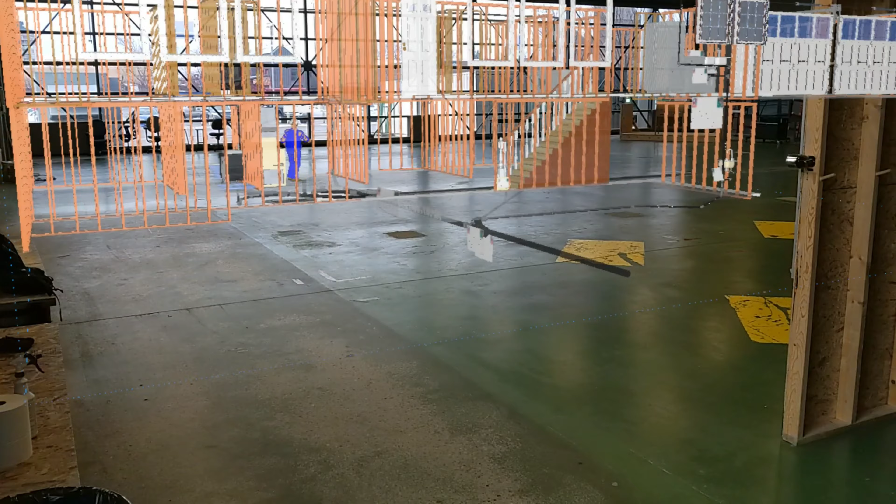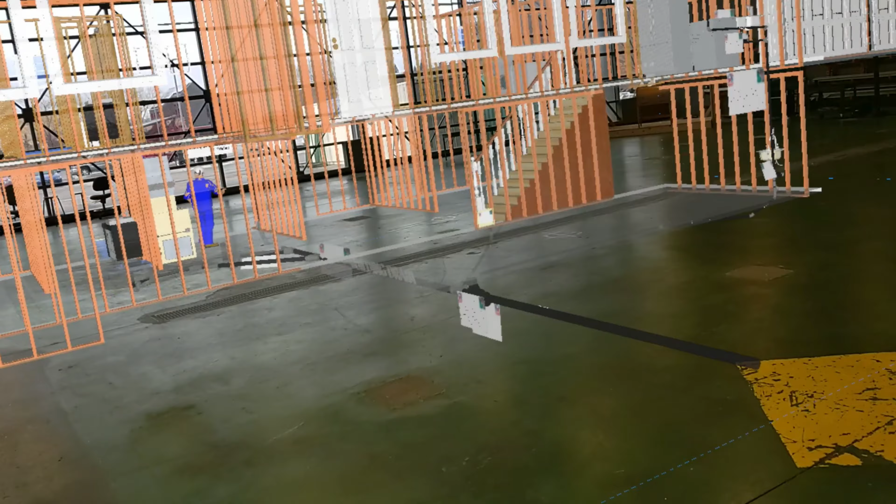Hi, this is Fred Bretsky at the AECOO Connector Lab here on the SAIT campus. Here we've been able to augment this bungalow, which is part of the second-year blueprint package for the pipe trades here at Sait. This is going to show the basement floor and the main floor of this house.

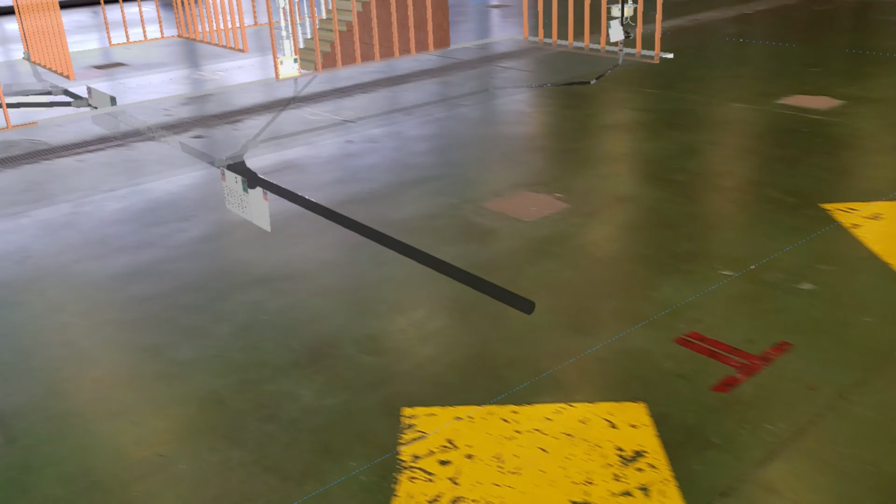Now, what's great about this is we can see the piping underground, which would be really cool. Can you imagine if you get your house built by mixed reality? Well, this is the house from the blueprint. We just augmented it out of the blueprint. And then you could actually see the plumbing underground.

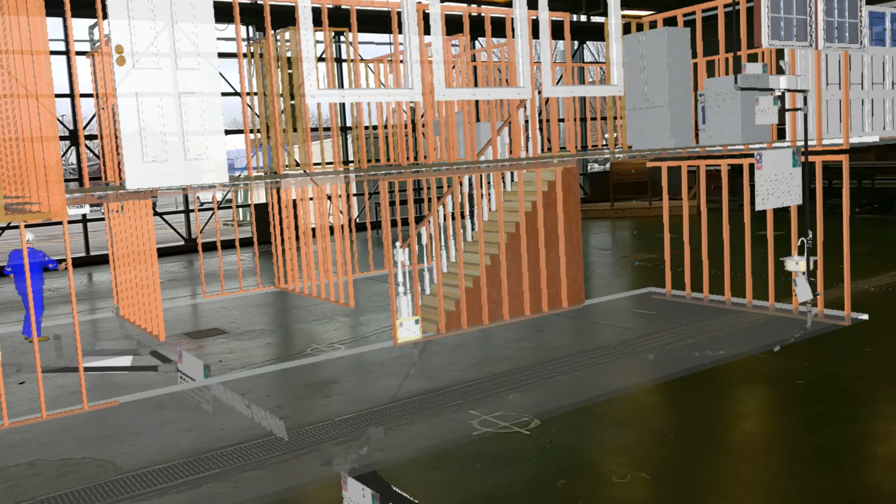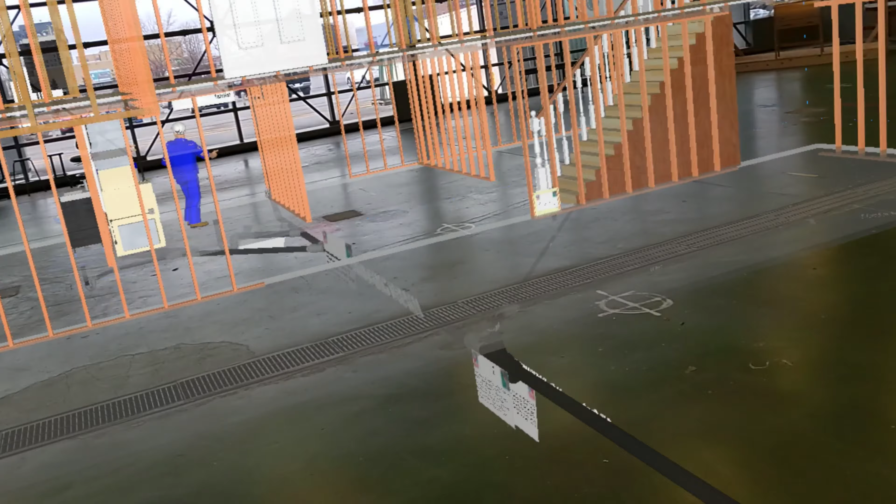This would save so many problems, because you must realize that if I send two plumbers to the same model of the house, they're going to rough it in a different way. They don't show the rough-in plumbing on the blueprint. That's what we teach them here at Sait. So this one I roughed in, and this is probably the closest you could get to actually doing it in real life. I've tried to do this to almost one-to-one scale.

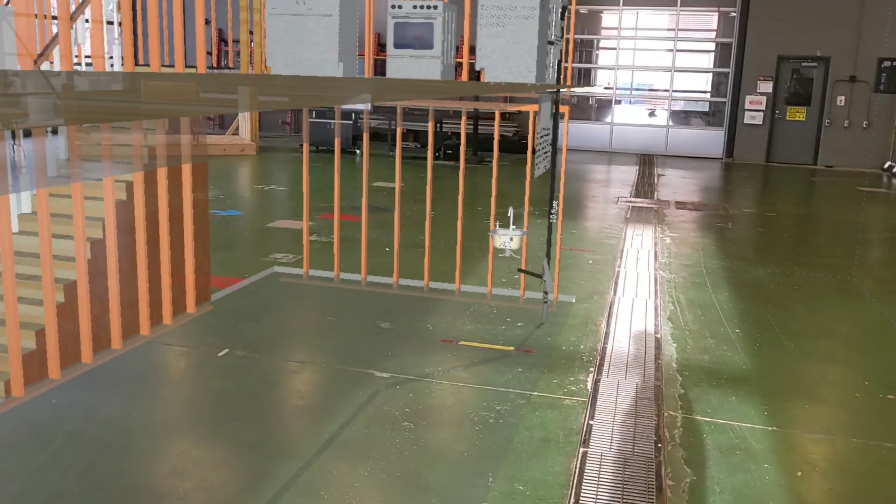So this is a bungalow. We're looking at the basement right now because I want to look at the basement plumbing. So here's the rough-in. So this would be the building sewer outside. So out here would be on the city property line, and then in here would be the sanitary building drain, which is right inside the foundation wall.

And there you're looking at the clean out, so we should really pull this up higher, shouldn't we? So I'm going to pull this up higher so you can see it's right above the floor. You'd see this clean out, and the rest of the piping would be under the floor. So that's our normally open backwater valve. So when you're roughing in a house, we want to keep the pipe as straight as possible, which is what we've done here. Today we're just going to show you a bit of the underground.

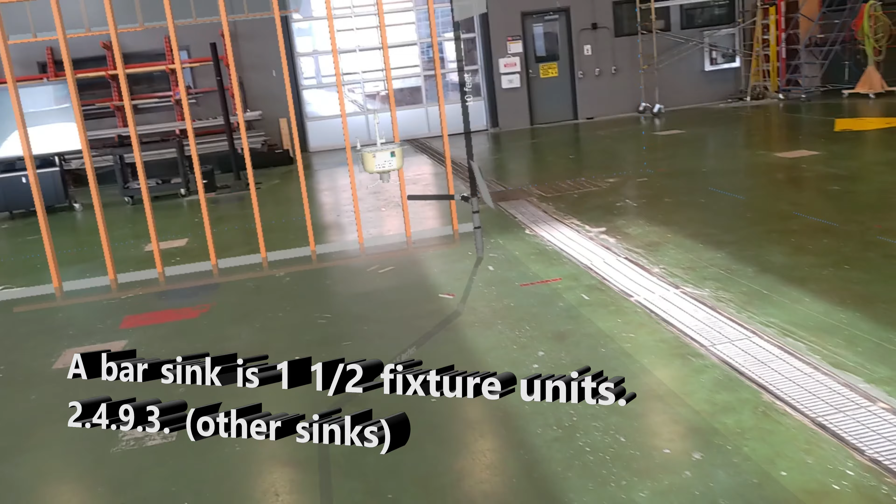So when the plumber first came in, he roughed in the Y here, and this is a 4x3 Y. In SketchUp, it's all to scale so you can measure it, but I wrote down the measurements. It's 3 foot here. And so I just took a 3x2 Y off and went down to our entertainment sink or bar sink, which is right here. We call this an entertainment sink or a bar sink. Still haven't hooked up the P-trap. Let's keep that still.

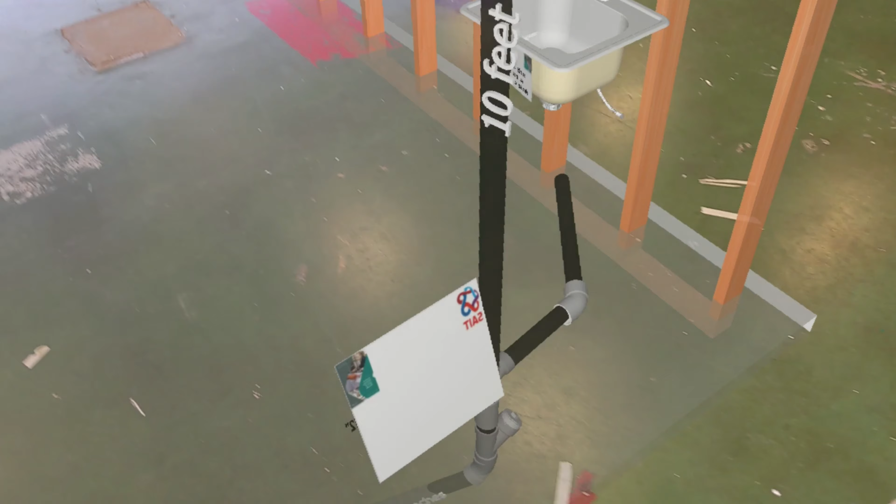And there we did a multi-story wet vent right up to our kitchen sink on the top floor. And there you can see I offset the stack vent around the window, and it goes up through the roof. So if we come back into the building here, let's go back to the sanitary building drain over here.

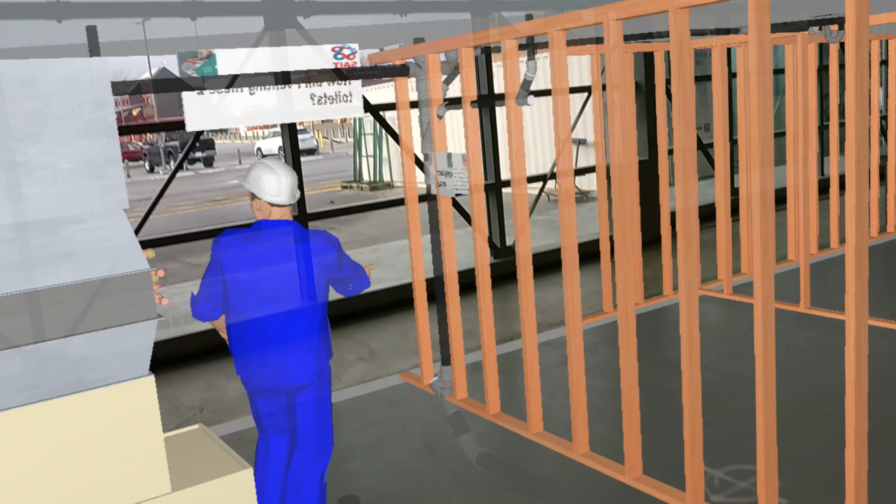Here's our building drain. See how we ask the question here, where does the sanitary building drain begin? It begins at the most upstream soil or waste stack, branch or fixture drain that has a toilet on it. In this particular case, the most upstream stack would be right here in the mechanical room. I'm going to lift it up a little more. Right here in the mechanical room.

And, how you doing, bro?

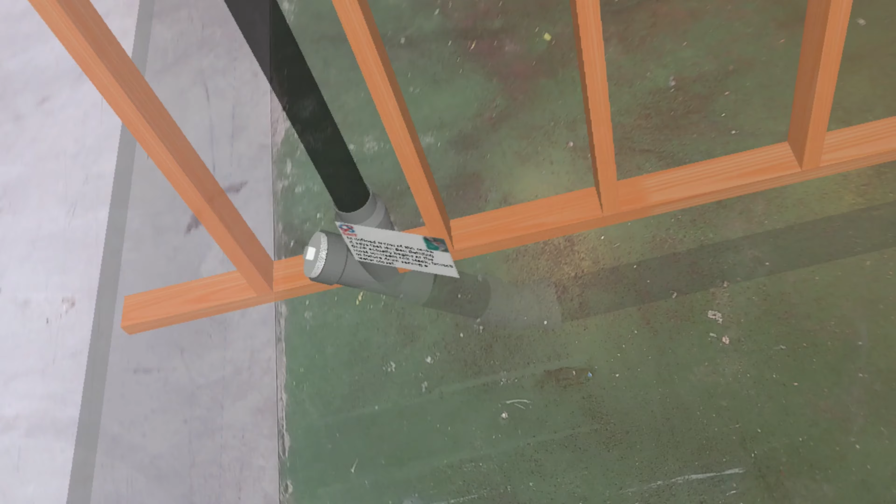Down a bit. And here's the main clean out. So if you follow it, the most upstream toilet would actually be this trap arm going to this toilet as I walk through a wall right here. And there's a toilet above. So that's the most upstream stack with a toilet on it. And there's your building drain.

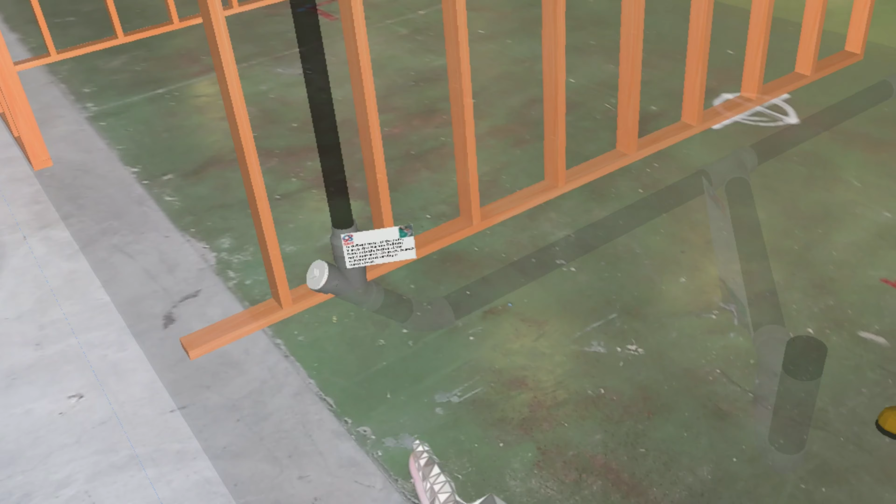Over here, I've run a floor drain, as you can see. And you can run that floor drain 32 feet, apparently, according to the code, 2563, without a vent if it's 4 inches.

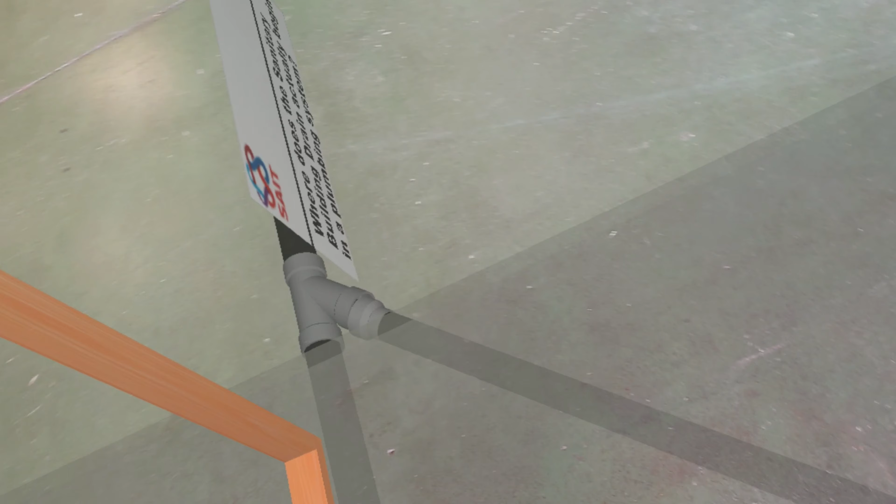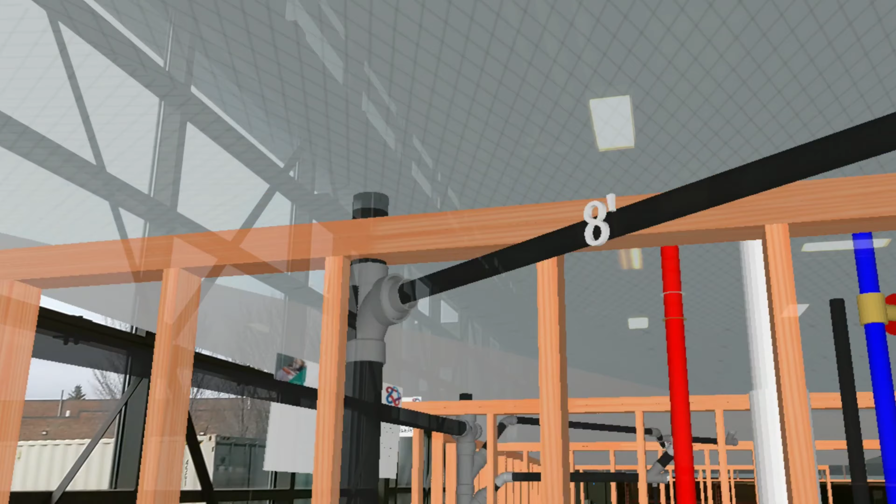And then over here, I Y off again off the sanitary building drain, and I am now taking this 3-piece bathroom in the basement here, which is this toilet, this lav, raise it up a bit, and this shower base, and they're all getting wet vented up this 3-inch stack through the shower and the vanity up above. The toilet's not involved with this wet vent, it's getting wet vented into that stack. So I'm really stack venting these 2 toilets up here.

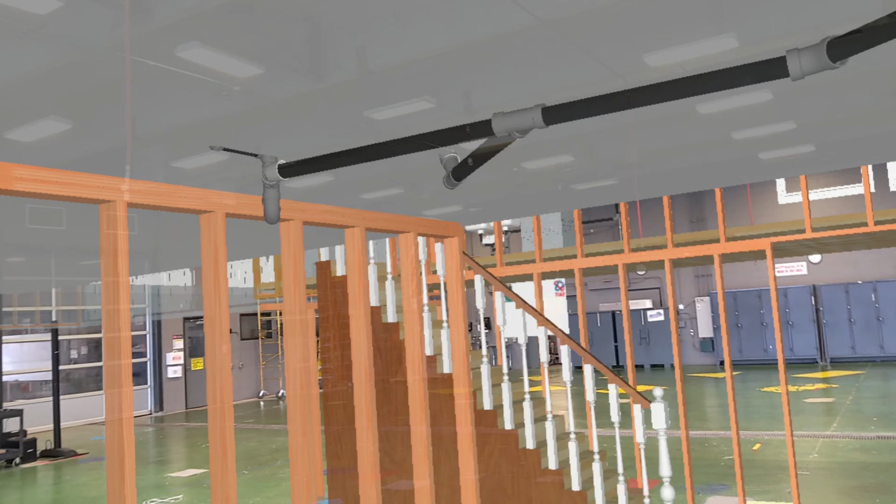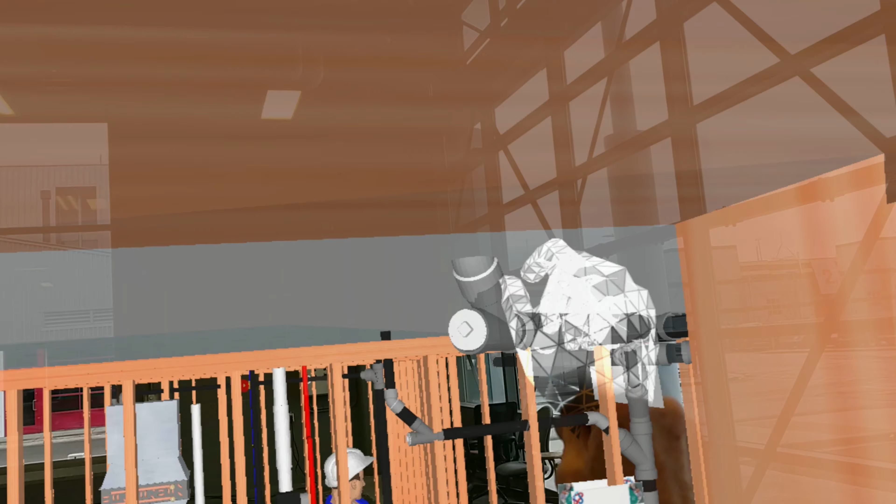Then if we go over here, this bathtub is too far away, so it's being individually vented. And there you can see there's 2 options for this individual vent for this bathtub. Let's bring it down so you can see. I'll just walk through the bathtub here. You can put the clean out up here in the towel closet, or you could put it down here. And my preference would be up above, so you can access it better.

So as you can see with mixed reality, it's great. You can see all the underground works. In the future, we'll probably be testing and inspecting with mixed reality because of its advantage: if you do it to scale, you know where all the piping is. In the past, we used to use other methods to try and find them, and they weren't that accurate.

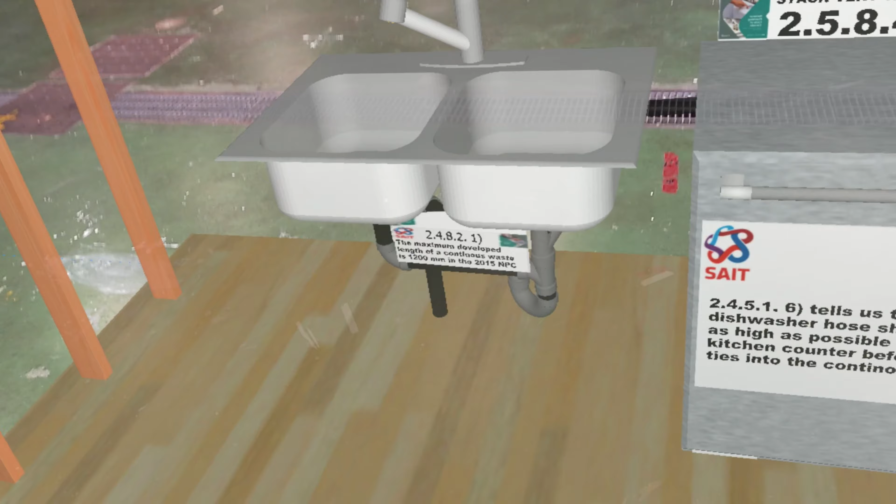So here I am above. One last thing before we finish this video, or I run out of time. I'll just bring you up in the kitchen and bring this down. And here we are in the kitchen. And as you can see, here is my dishwasher and my double kitchen sink and the continuous waste for it. You can't really put these pipes in the outside wall. That's why that's offset. But you can put the vent in the outside wall.

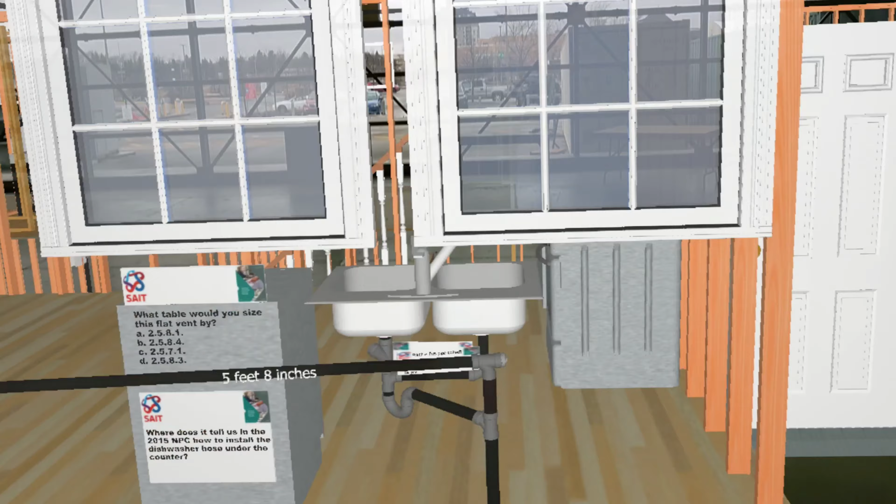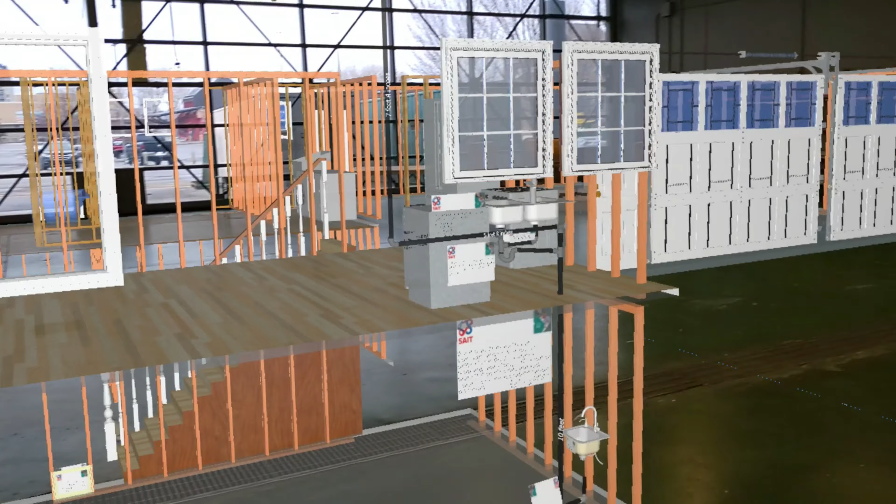And so that's basically it for today, as you can get an overall view of how we rough in a house. So in second year blueprint, and I use it in third year too, we're going to use a QR code to augment this house right out of the blueprint, and then take them down here to the AECOO Lab and walk through it and teach people, bring the site right to SAIT. That's what we're doing. So we can teach our apprentices right here on the SAIT campus.